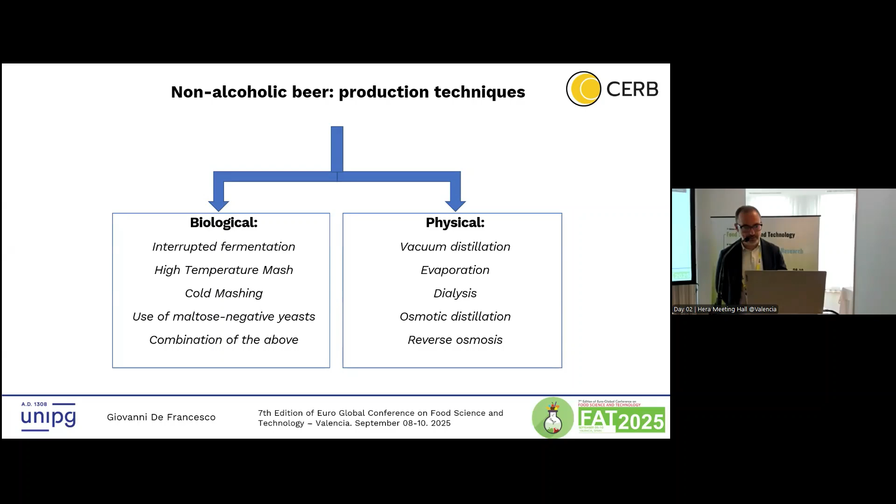And now just a look at the most important techniques to produce low alcohol beer. We have biological techniques and physical techniques. And today we have a look to understand the difference between these kinds of technologies. The first that we will see is vacuum distillation. This is a technology that is very, very common today in the brewing industry. Maybe in the large beer industries it is the most important process that they are using to produce alcohol-free beer.

Why? Because first, this technique can remove alcohol completely. And we are seeing on the market that beers with zero alcohol are the most attractive for consumers, because they absolutely don't want alcohol. And also some places have religious reasons that you cannot drink alcohol. So most large industries are aiming at zero, completely zero alcohol. And with this technology, it's possible.

Vacuum distillation is a technology that can remove alcohol at a lower temperature than normal distillation used to produce gin and other similar distilled products. In this case, the process is running at 38 to 42 degrees, thanks to the vacuum. So there is low thermal stress on the beer, and also it is a very fast process, some seconds to remove alcohol.

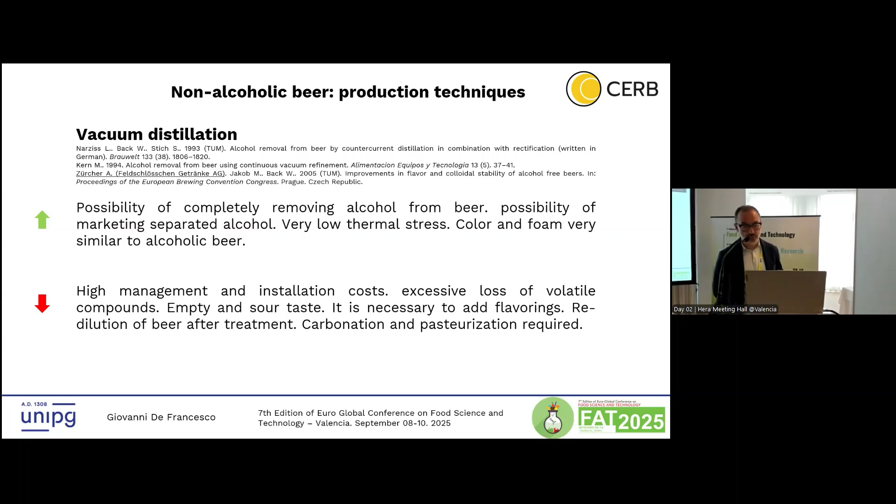Then the beer must be diluted after treatment. Then the beer must be carbonated because the carbon dioxide is completely removed during dealcoholization. And then pasteurization is required. So as you can understand, it is not a simple process. And the plant is very, very high in cost. So this investment today is almost reserved only for large beer companies.

Then there is reverse osmosis, which is a process a little bit simpler than the previous one. It's useful for beers with a very low alcohol content. It is possible to produce 0.05% of alcohol easily. It is a cold process, so the dealcoholization is around 20 degrees. And also there is relatively simple plant engineering.

Anyway, high running costs for energy. Reverse osmosis is impactful in energy. Carbonation is necessary. Excessive loss of volatile compounds, as I said previously. And sometimes the process has high water consumption.

As I said before, for reverse osmosis, pasteurization is necessary, like vacuum distillation.

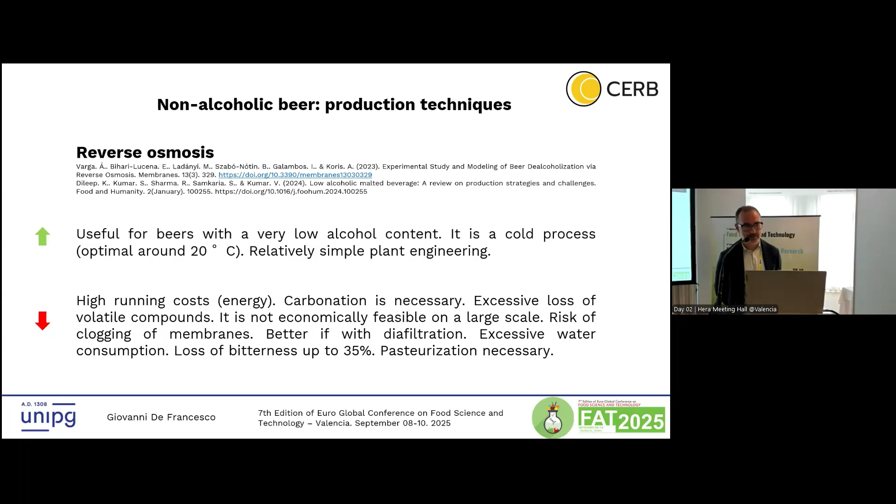Then there is osmotic distillation. It's a relatively new technology. I worked on this technology for some years during my PhD experience. It's a process that uses semi-permeable membranes able to remove ethanol from beer, and the ethanol moves from beer to water. So you have a membrane, and on one side there is beer, on the other side there is water, and the alcohol moves from beer to water. But obviously not only alcohol, also aldehydes, esters and so on. So the beer at the end of the dealcoholization must be flavored with something, otherwise the taste and flavor is empty. Also in this case, carbonation is required.

Excessive water consumption is a drawback. When I made experiments some years ago, we used 6 liters of water for each liter of beer to dealcoholize it. And again, pasteurization is required.

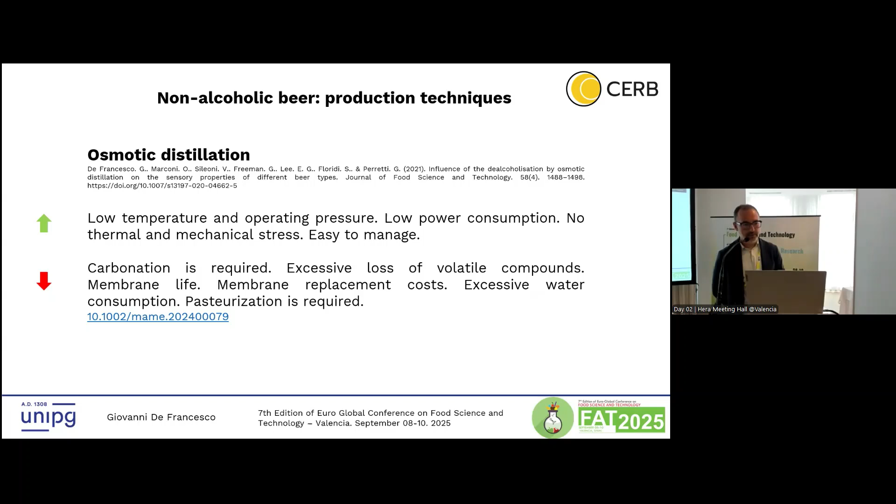As you can see, in any of these technologies, pasteurization is required. Why? Because there are some recent studies that highlighted that in a low alcohol beer, pathogens can also grow. In normal beer, it is not possible to find pathogens. In low alcohol beer, yes, it is possible. So pasteurization is strictly necessary for this reason.

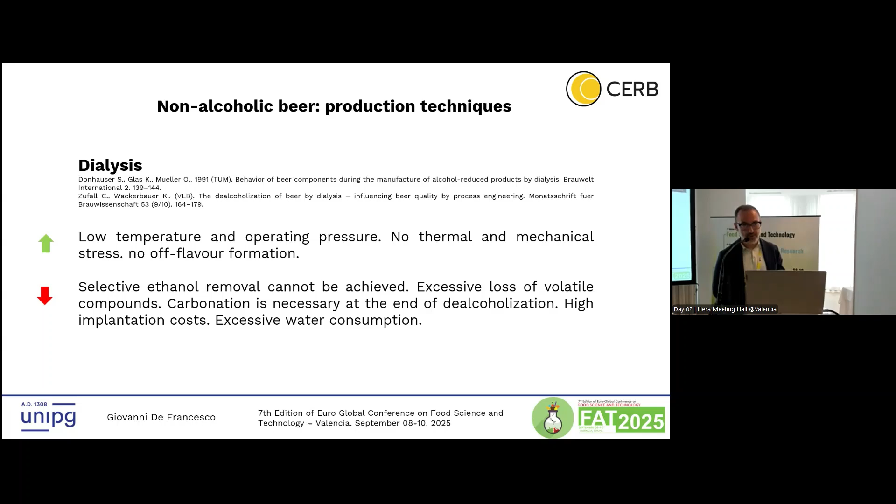And also, pH management is very important. We will see later.

Except for physical technology, there are also biological technologies that are simpler, sometimes easier to manage for small craft beers. So sometimes you can find products on the market produced with this technique, usually made for craft beer, craft breweries.

For example, interrupted fermentation is the only biological method of producing alcohol-free beer with less than 0.05 alcohol percent. It's relatively simple to manage because you need just a fermenter, wort, yeast, and a very short fermentation, some hours, just a very few metabolites from fermentation. Then you stop the fermentation by cooling down the beer. In this way, the yeast is not able to ferment, and then you need to remove the yeast by filtration, and then stabilize the beer by pasteurization.

In this case, pH management is crucial, because without fermentation, there is no dropping of pH, since the dropping of pH is caused by yeast during fermentation. But if there is no fermentation, there is no pH drop. So sometimes this beer has a pH more than 4.6, which is too risky for botulinum. So it's very important to manage pH in this kind of beer.

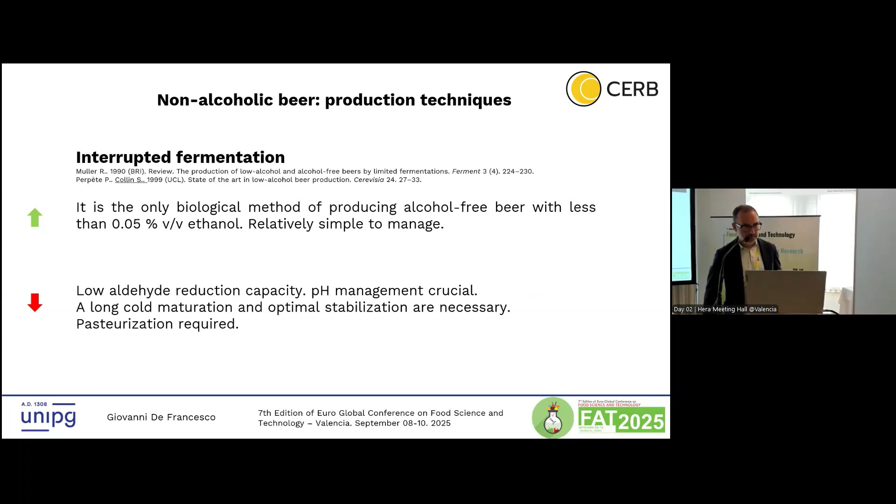High temperature mashing is another technology to produce a low alcohol beer. The wort is produced during mashing at high temperature. In this case, you avoid the activity of beta amylase, enzymes that produce maltose, a fermentable sugar. So we avoid these enzymes working by going at a higher temperature than optimal for this enzyme. So we have sugars, but a very low amount of fermentable sugars.

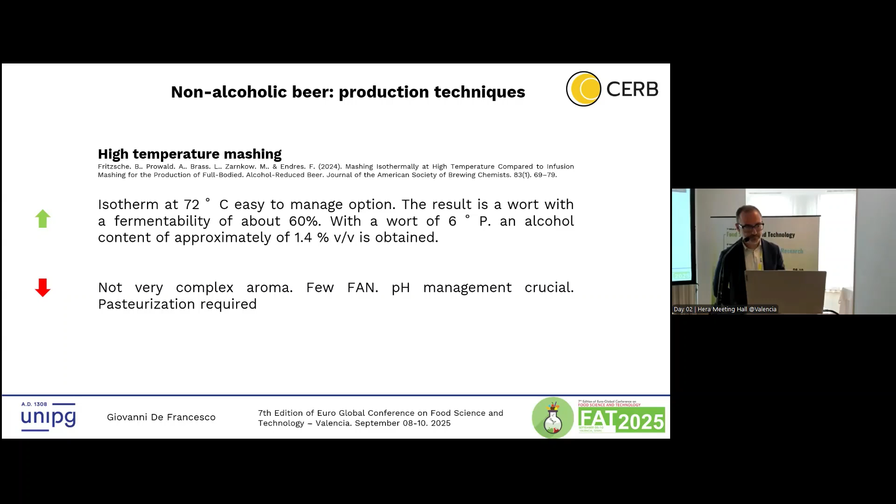But anyway, again, pH management is crucial. Pasteurization is required. In our work, we used a combination of high temperature mashing with negative maltose yeasts, which are yeasts able to ferment just sucrose and glucose, but not able to ferment maltose, which is the main sugar in the wort. So at the end of fermentation, we have a low amount of ethanol.

And then we also use innovative hop extracts to increase the flavor of the beer, because, as I said before, this kind of beer has a lack of volatile profile, a lack of intensity in the nose and taste. And then at the end, we evaluate the influence of pasteurization on the quality characteristics of this kind of beer.

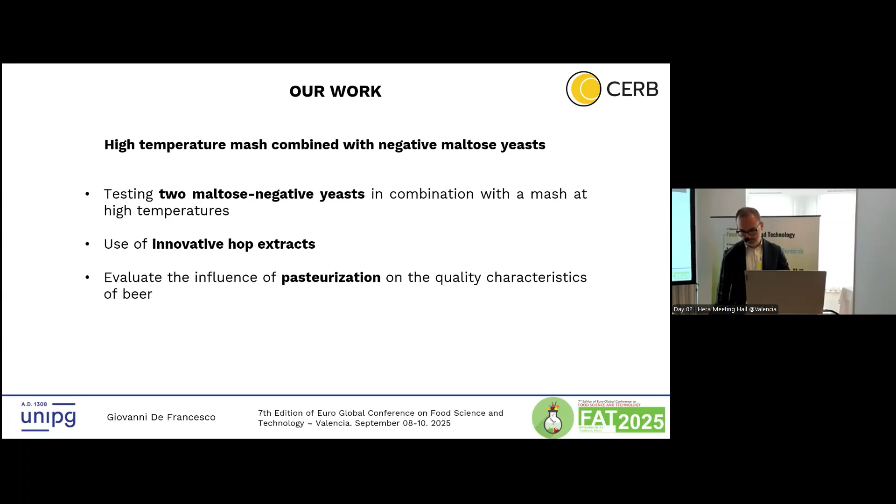The beer was produced according to the following recipe. Sugar at the beginning of fermentation, original Plato degree, was 6, a very low amount. Normally in a normal beer this value is 12. In this case it's 6, so we wish a low amount of fermentable sugar.

Bitterness was 10, a very low amount. If you know India Pale Ale, a very famous kind of beer, in that case the IBU, the bitterness, is up to 40 or 50 sometimes. In this case we want a very low amount of bitterness, because otherwise this kind of beer can be too bitter at the taste.

We produce this with a mash at a temperature of 75 degrees, when normally in the beer industry it's 52 degrees. So it's a completely different temperature, a special mash for this kind of beer. We made the rest at 75 degrees for 30 minutes, and then the rest at 78 degrees for 5 minutes. Boiling for 60 minutes as a normal wort production schedule.

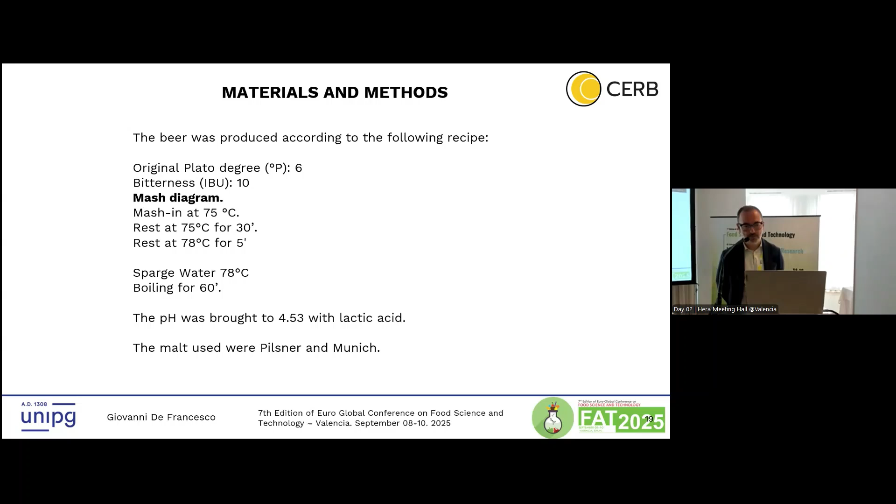Then the pH was brought to 4.53 with the addition of lactic acid.

Then the beer was fermented with these yeasts, conventional yeasts that are unable to use maltose, for 4 days. So a short fermentation, and then the temperature was cooled down to 0 degrees for 5 days.

Then we removed the yeast. The pH was further lowered to 4.3 with the addition of lactic acid, and then the beer was filtered with a polypropylene cartridge to remove yeasts and other colloids that occurred during fermentation.

After filtration, the two samples were separated, and in the samples we added Hyperboost, Yakima Chief, Citra, and Mosaic, that are hop extracts, highly concentrated. It's an innovative hop extract that has been sold for some months on the market.

You can see just some microliters per liter of beer are able to increase the flavor profile of beer. This kind of product is developed especially for the correction, for increasing aroma directly on filtered, stabilized beer, so just before bottling.

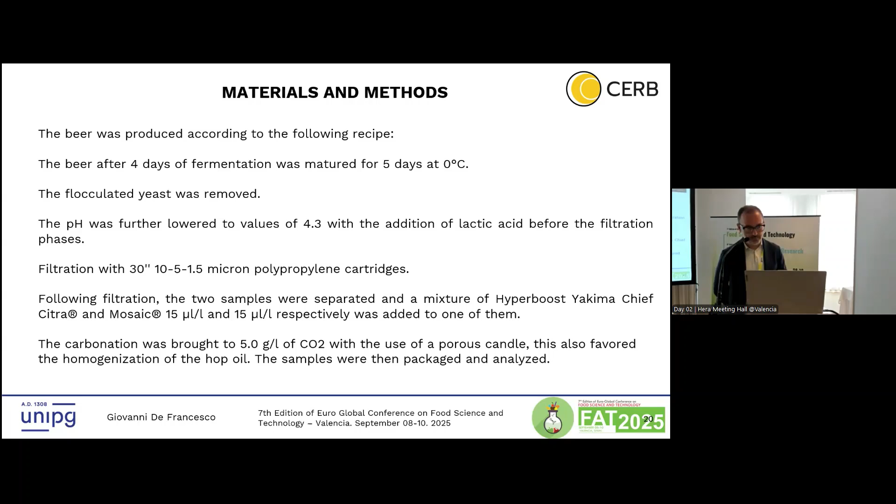The two yeasts that we used in this experimental work were from the market. One is from Fermentis company, the second is from Lallemand, two companies that produce yeast for brewing. One is called LA-01, and the second is Lona.

So at the end of the experimental design, we had 8 samples: 4 unpasteurized and 4 pasteurized. Among the unpasteurized, we had a sample without hop and a sample with hop added at the end of filtration before bottling. So we had 8 samples.

We performed normal analysis, volatile compound analysis, and aroma and taste analysis by sensory panel. All the analyses we performed are according to Analytica EBC, the guidelines of the European Brewery Convention, and we followed this method.

We checked original, apparent and real extract, alcohol by volume, apparent attenuation and real attenuation, pH, color of beer, bitter intensity, age, turbidity, and foam stability by the Nibem method, which checks how many seconds there is foam on the beer, so the unit of measurement is seconds. Then the sensory analysis was done by a trained panel.

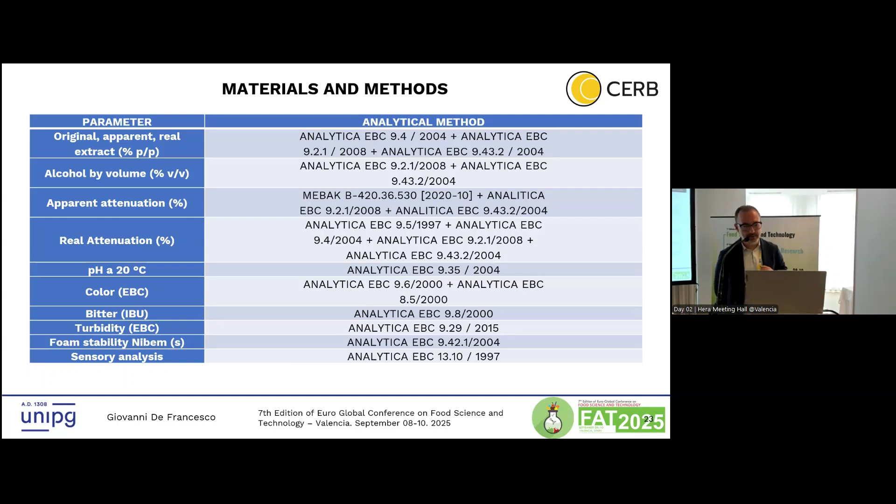Let's have a look at the results.

Then we measured the pH and the bitterness. pH, as I said, is very important for this kind of product. The pH was stable and similar between samples, around 4.3. Bitterness was a little bit higher than the schedule we wished for—the target was 10, but at the end of the analysis it was 20. So the bitter perception is a little bit higher than expected.